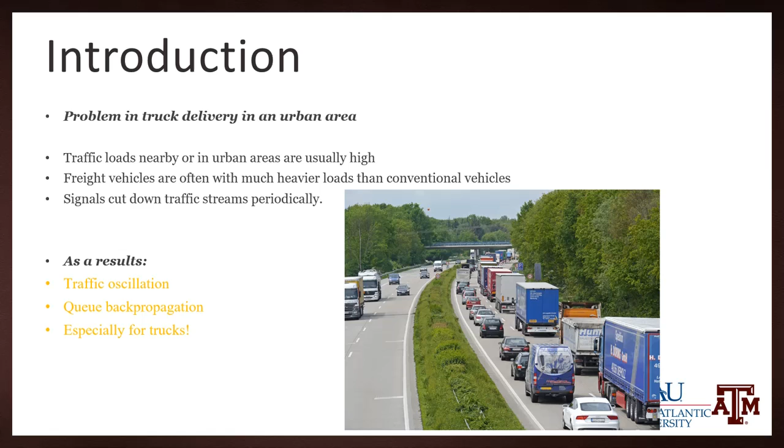Traffic loads in an urban area are usually high, and freight vehicles often carry much heavier loads than cars, giving them less flexibility in changing speed. Signals can force the truck to stop and restart frequently. As a result, due to car-following driving behavior, traffic oscillation and queue back propagation may occur, bringing inconvenience for truck drivers and other drivers and increasing travel time.

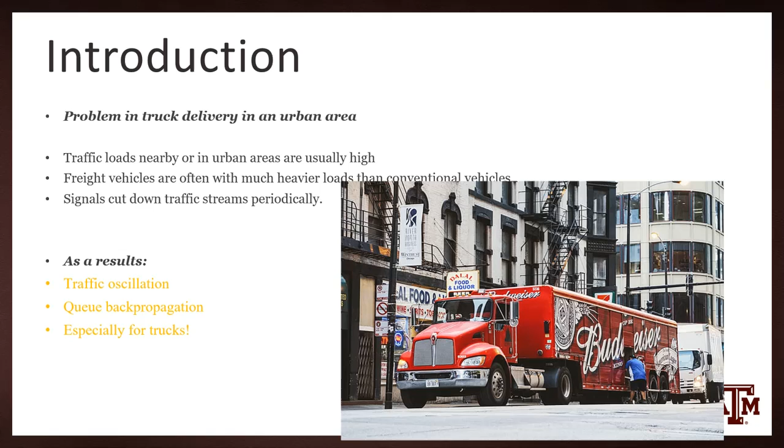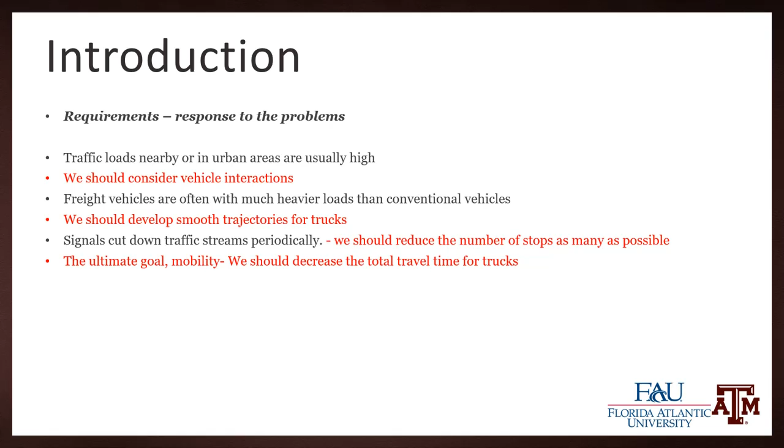We need to tackle those problems. To address traffic loads, we want interactions with other trucks to have less influence on speed. To tackle problems from heavy weights, we seek smooth, non-stop trajectories for trucks. To address problems caused by signals, we wish trucks wouldn't stop frequently. After all, we want the mobility of trucks to be improved.

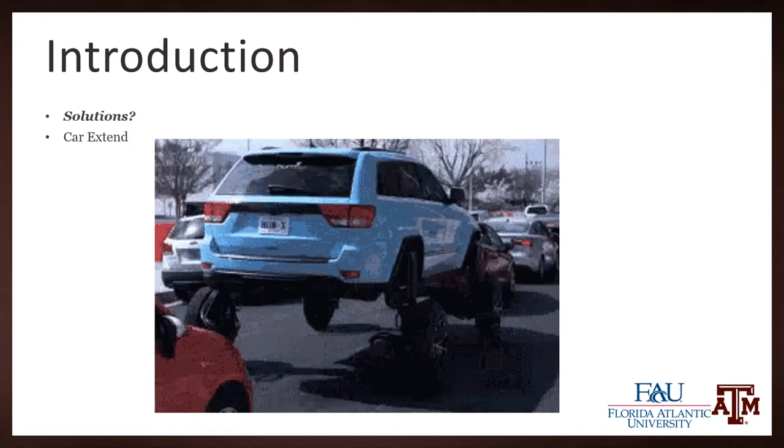So here come solutions. Become a guard and remove all the preceding vehicles - unfortunately, we assume everyone's time is equally important, so we cannot do this. How about cutting the line? Probably we could try this, as long as other drivers will not do the same.

At the end of the day, we decide to use something else we are good at: CAV technologies. We are trying to design driving strategies in the longitudinal direction. CAV refers to connected and automated vehicles.

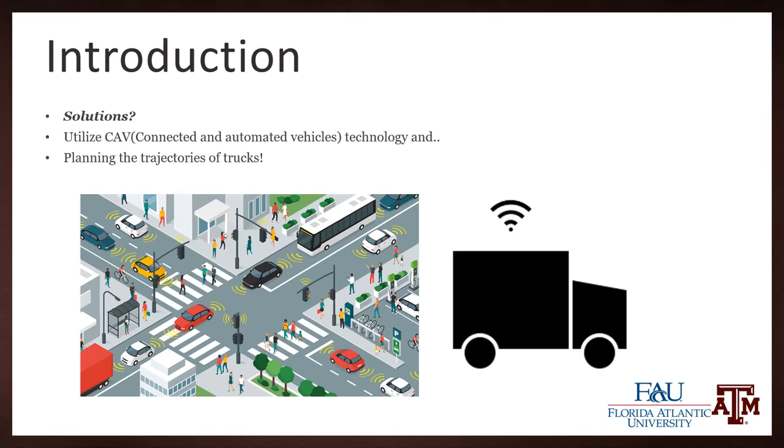Trucks equipped with CAV technology will be able to get information from traffic signals and other CAVs. Based on this, we try to develop an algorithm helping plan truck trajectories so they can go smoothly and fast, even on a signalized corridor.

The solution comes from a paper we are preparing. We start by drawing a longitudinal representation and see how the problem can be described mathematically. Consider a truck-only lane in one direction, and plan the trajectories of CAV trucks without changing the signal. We do not want to prioritize mobility in one direction by just shortening the green time from the other side.

In an urban area, sometimes there are no sideways - you cannot just adjust signals while sacrificing green time from the other side. On this lane, traffic is a mixture of yellow human-driven vehicles and blue CAVs. We make this assumption to make the problem more realistic, because you cannot expect all vehicles to be CAVs.

We define the state of the vehicle using its current speed and acceleration and its relative position within one block, and we link the state of the vehicle in different blocks with the expected passing moment at each intersection on this time-space representation.

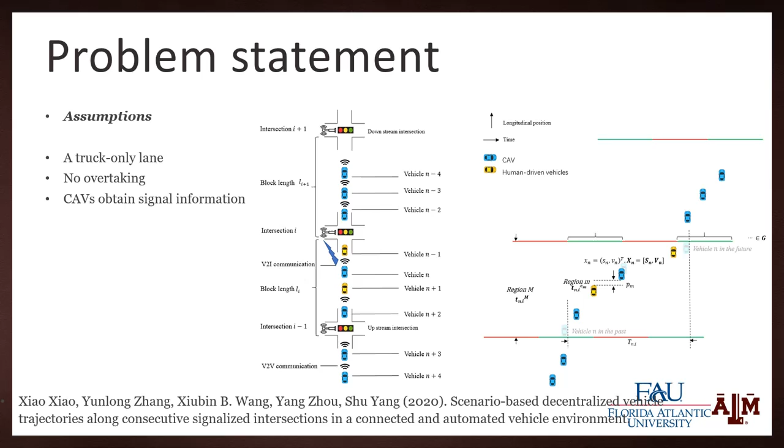The problem reflects a vehicle control or traffic planning problem under certain constraints. According to the literature, the CAV planning or control problem at signalized intersections has been studied over the recent 15 years. Some studies focus on one single vehicle or one single intersection. Few consider the problem with multiple vehicles along multiple intersections.

Besides, centralized structures are easy to solve but cannot handle changes in the driving traffic. For example, adding one extra vehicle from the sideways would be hard for a centralized structure. Decentralized settings are more extendable in this case and require less computation. So we consider the decentralized structure in our paper.

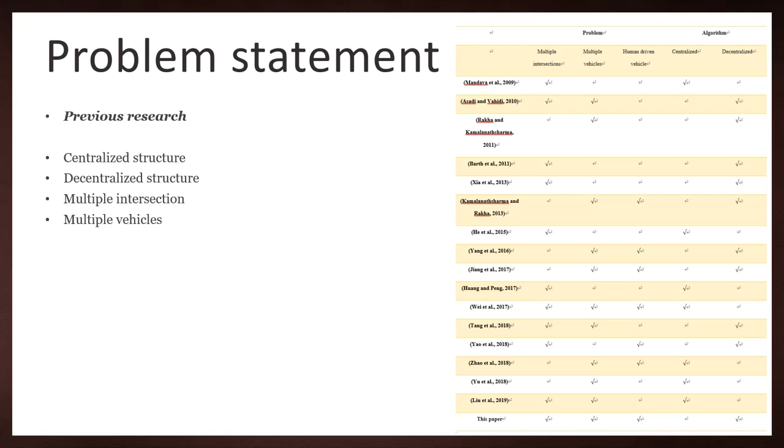The difficulties are here: we should consider how to adapt the vehicles to the signals, handle the interactions between vehicles, and decide the sequence of planning. Because a subject vehicle will impact others, while to obtain a trajectory we also need information from other vehicles.

Besides, arrival moments are usually only obtained once a vehicle has reached its destination. But to plan a trajectory, we need to know its arrival time in optimal control. This is actually a chicken-or-egg causality dilemma. Luckily, we are considering a one-direction road, where only followers are influenced by preceding vehicles.

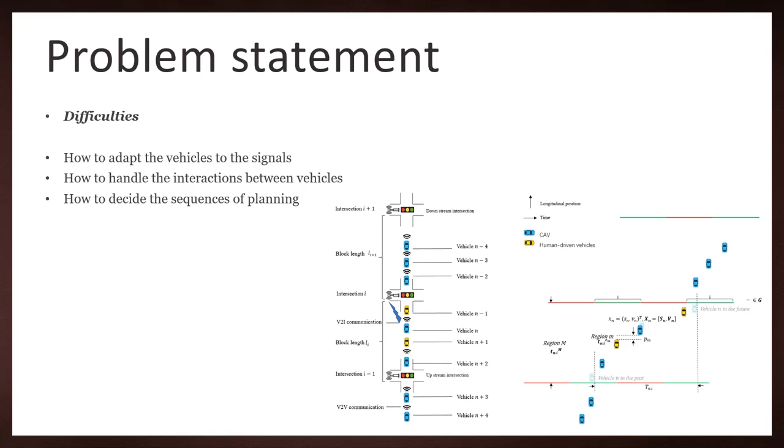And we have CAV technologies. They can provide information about signals and other CAVs. An expected arrival time can then be used for the planning.

The main idea is to tackle the difficulties effectively. We adapt the vehicles to the signals and decentralize the problem, considering all possible scenarios for a subject vehicle. To handle the interactions between the vehicles, we must consider the constrained optimal control.

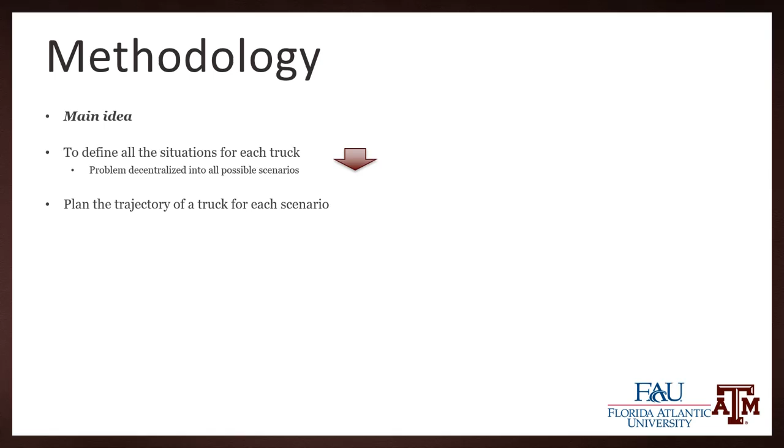Remember the chicken or the egg dilemma? The answer is to start from the vehicle and develop a way to identify the scenarios for every truck, then solve the optimal control sequentially. These stages are done simultaneously and iteratively.

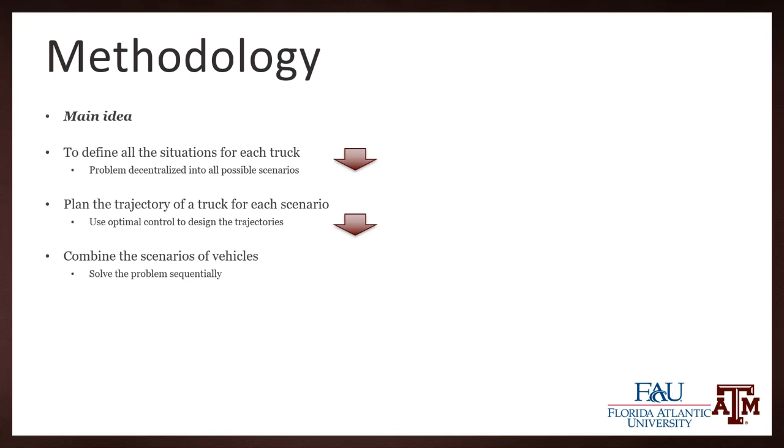Now we'll start looking at how the problem is decentralized. The factor to differentiate the scenarios is the relative type of vehicle interactions and the moment approaching a signal. We would like to know that the minimal travel time is feasible under each scenario.

Here, GNI is indicated to show the passing moment. It is the duration between the moment of the nearest green time start and the moment the vehicle passes this intersection. GI is the green time at intersection I, and theta is the offset.

In the diagrams, we use the blue line to represent the conventional trajectory of a human-driven truck, and the black line to show the possible preceding vehicle trajectory. We use a pink line to show the possible trajectory of a CAV. Human-driven vehicles here are uncontrollable; we involve them only as a constraint.

In the first diagram, scenario 0, it shows when a CAV follows no preceding vehicle within the same block. The second one, scenario 1, shows that for the subject vehicle with no preceding vehicle in the same block, the trajectory is not expected to travel through the block within this cycle.

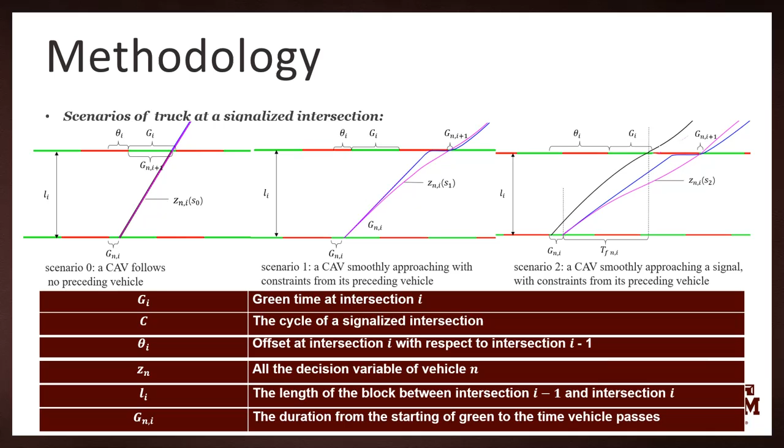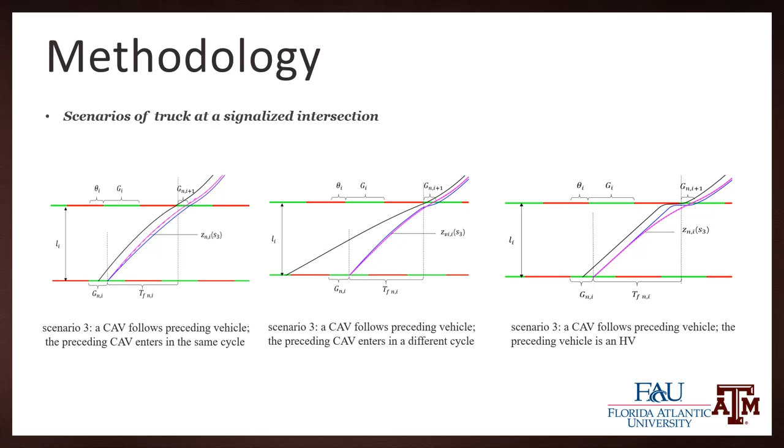We also have scenario 3, when the subject vehicle follows the preceding vehicle in this block and the subject vehicle passes within the same green window. Although there are some different types of scenario 3, they show no influence on the calculation of minimal travel time or trajectory planning, so all of them are defined as scenario 3.

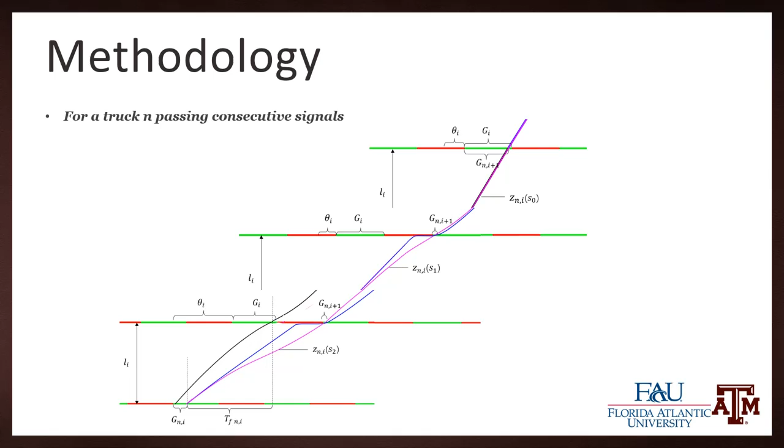If we fix on a specific truck, the trajectory of it is composed of several consecutive parts in each block.

So now we have many scenarios. How do we calculate the minimal travel time and its trajectory? I will take one as an example: scenario 1.

As described before, GNI is the duration of the moment of the nearest green time start and the moment the vehicle passes the intersection. We first look at the minimal travel time.

Instead of complex optimization, we can use traffic signal knowledge to write an equation. It's easy to show that the minimal travel time can be reached as long as K star and GNI plus 1 are minimized.

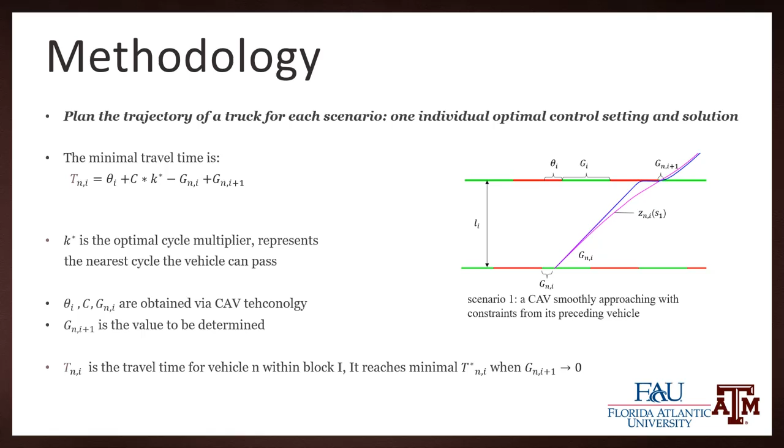Therefore, instead of carrying out optimization, we can find the logic for each scenario and obtain the minimal travel time using these equations.

And we have decided the travel time. Then we can use it for our optimal control problems to design an actual trajectory.

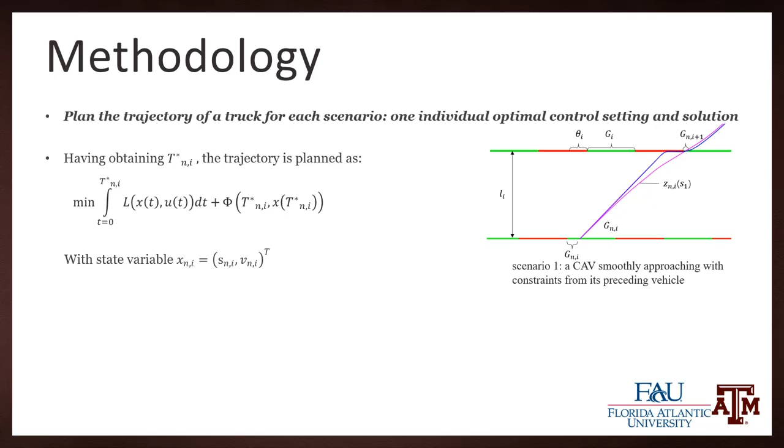Recall that we want a smooth trajectory. We use the position and the speed as the state variable x.

We put the running cost L as the quadratic term with regard to speed and acceleration, so as to make the trajectory smooth enough. As for the terminal cost, mobility factors are concerned, so we involve the targeted speed to ensure the speed of the traffic, and the targeted distance so that the truck can make it to its destination.

The constraints come from two sides. Omega shows the vehicle dynamics, and U shows the constraints from the road and the preceding vehicles.

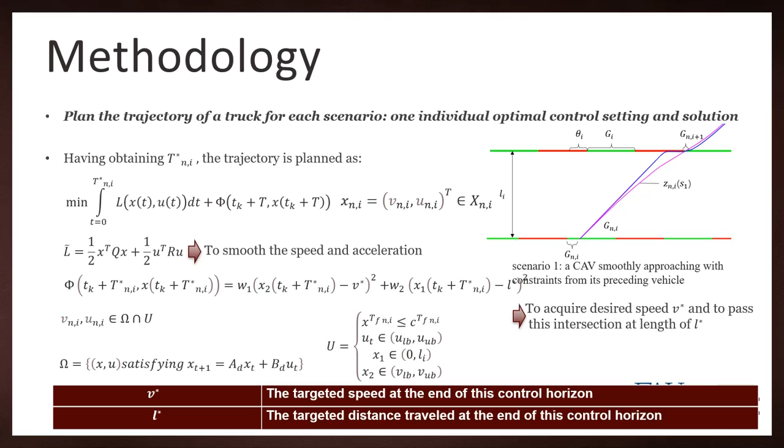We do this for all the scenarios. So now each CAV has its solution under each scenario. So how can we extend this case when considering all of them?

Let's go back and look at the minimal travel time problem. From that, we can get two propositions under our assumptions. According to proposition 1, the minimal travel time of a vehicle along consecutive signals is a function of k. Recall that k star is the optimal cycle multiplier, representing the nearest cycle the vehicle can pass.

According to proposition 2, saving a leader's travel time will not increase the follower's travel time in the same block. These two propositions are proved, and the details are in the paper. Using the propositions as a heuristic, we can get some inference.

At each intersection, the preferred scenarios are scenario 0 or scenario 3. But if it should be scenario 1 or 2, we would better plan it with the minimized k star. Also, from these two propositions, we can show that the total travel time in our assumption can be reduced just by finding the minimal travel time for each vehicle.

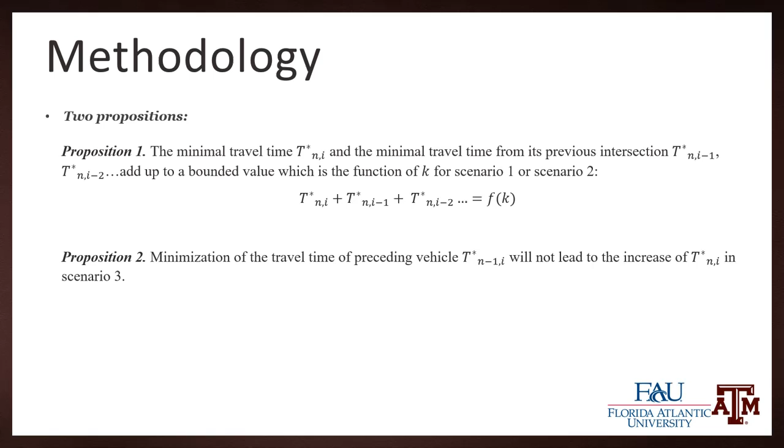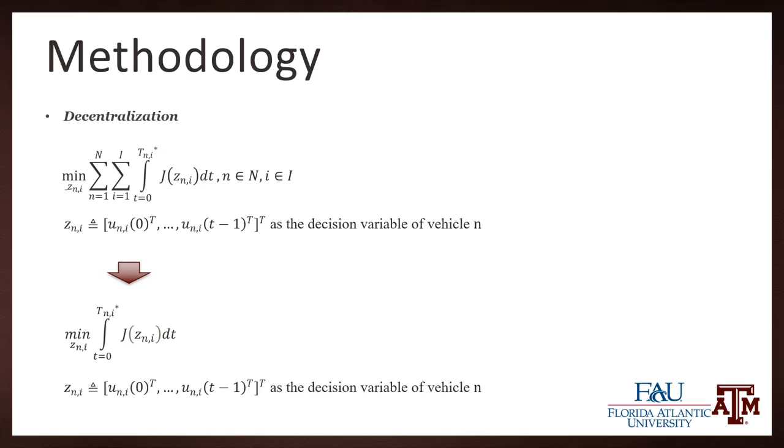Using the propositions, a general formulation is decentralized to the solution of each vehicle with sequences. We can show it here. We start the planning from the first vehicle which enters the first block. At the same time, the second vehicle starts its planning. Each CAV solves their problem and broadcasts their solution information to other CAVs. This proceeds until all the vehicles have their solutions.

Human-driven vehicles are simulated using the car following model IDM, Intelligent Driver Model. When the human-driven vehicles approach a signal, they will slow down and restart when unable to pass, which is normal human behavior at the signal.

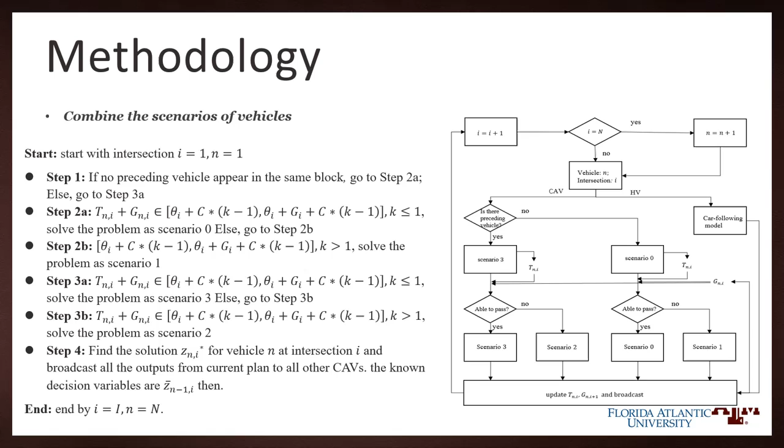So the proposed method was implemented in MATLAB, and the simulations were demonstrated. Let's look at the case when the demand is moderate first.

When the traffic demand was moderate, the CAV trajectories would lead the whole platoon to decompose and reconstruct at the correct time. The proposed method can reduce the number of stops. As a result, the queues and back-propagating shockwaves were mitigated to reduce the start-up time. And the method compresses the headways for the CV towards its desired headway, which makes the traffic stream compact.

Compared to the situation when all vehicles are human-driven, this influence becomes more significant with the increase of penetration rates.

When the traffic demand was set to be extremely high, the demand was actually higher than the capacity. Although the initial headways were so small that they could not be compressed, the travel time still benefited, since the whole traffic still decomposes and reconstructs in a good manner to ensure vehicles pass with the shortest possible time. And the queues and back-propagating shockwaves are also relieved.

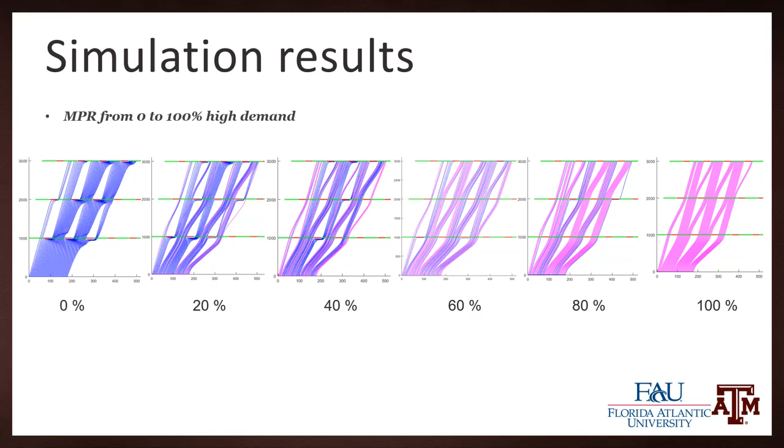We conducted multiple runs with various random seeds for each penetration rate, and the average travel time saving was here. When the penetration rate of CVs was as low as 20%, the method could lead to a small negative saving in travel time.

This is due to the fact that we set a large desired headway for a CV following a human-driven vehicle, to ensure safety when we consider the uncertainty of the human-driven vehicle.

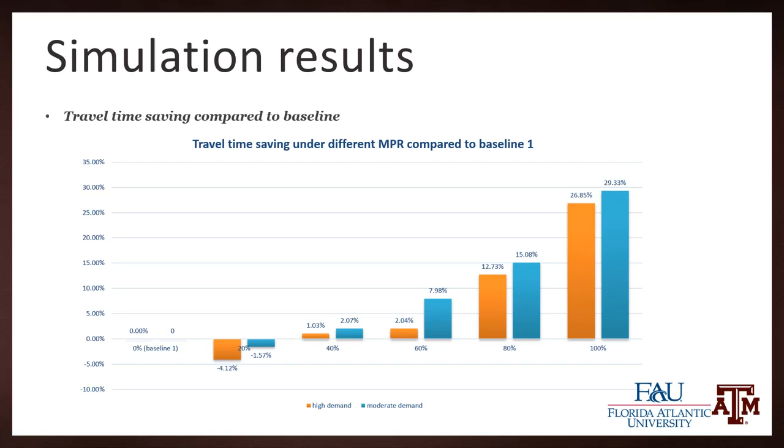With increased penetration rate of CVs, travel time savings improved, and the savings were significant when the penetration rate was larger than 60% for both cases. When full penetration rate was assumed, 100%, the saving is around 30% when demand is moderate and around 27% when demand is high.

If we just design smooth trajectories without consideration of optimizing travel time, that could also be an option. However, in that case, even if the headway can be compressed, travel time will not be saved. The truck driver will move slowly without stops but cost more time.

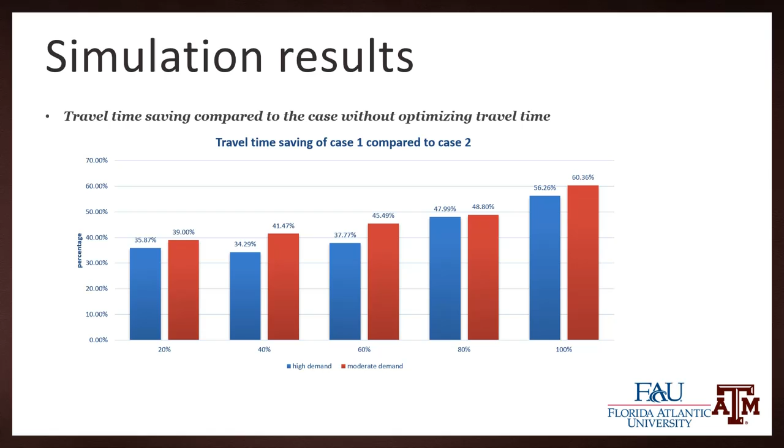So far, we have gone through our method and some problems are solved. We developed smooth trajectories for trucks to ensure their speed while relieving traffic oscillation and queue back-propagation. We reduce the number of stops caused by signals, and we save the travel time of truck drivers.

What is more, we have simplified the problem to a structure that is effectively solved and extendable. The computation time is less than 1 second in MATLAB, which is suitable for real-time application.

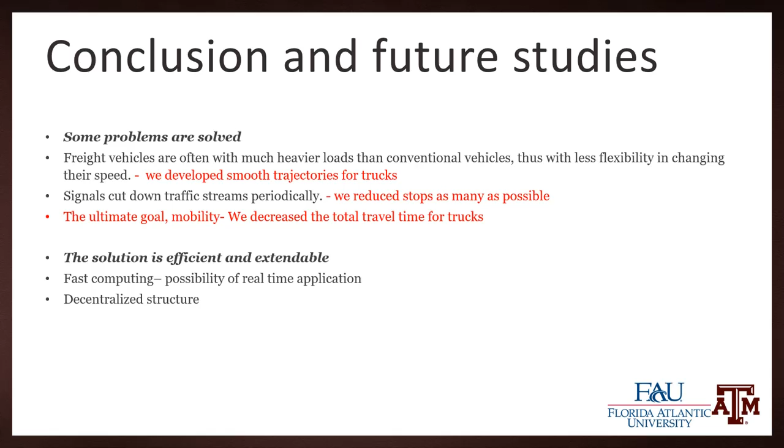Due to the decentralized structure, we can extend the method to involve more complex factors in our future studies. For example, we involve lane changing and turning flows in our most recent research.

We are convinced that this research can help with the mobility of trucks in the last mile problem and make truck drivers happy, saving their precious time, which is most important.